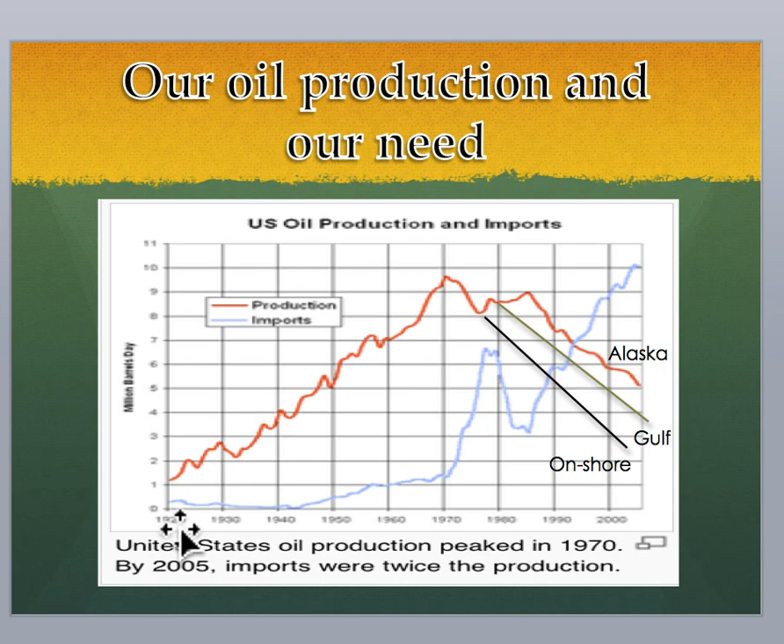They're slowing down now towards 8%, and Wall Street is panicked. But the ridiculous fact is that if they just stayed at 7%, by 2015 they will have doubled our carbon footprint. They're already greater than we are, but they will have doubled it.

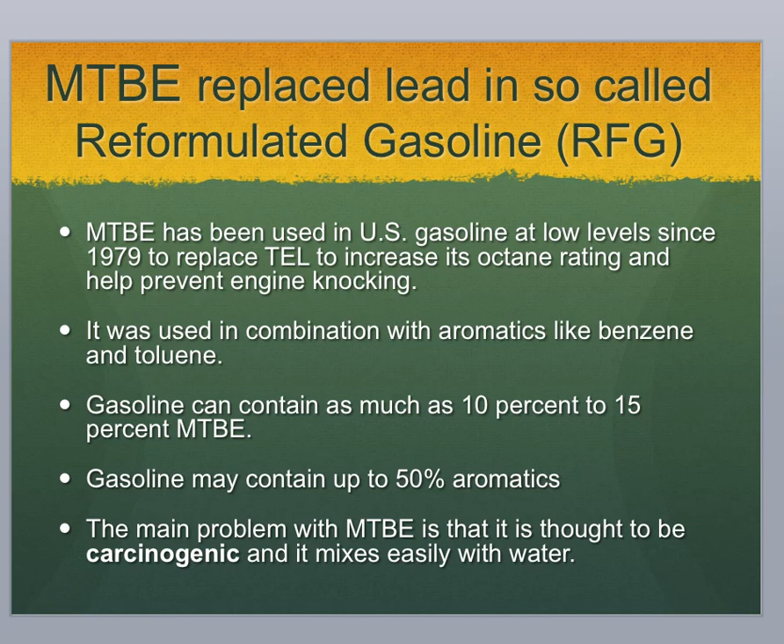So you were drinking basically water that would give you cancer. That eventually got to the point where it was legislated out. But before we get there, let me point out that the other thing they put into gasoline to get that octane rating up, so you had the power you expected from a gallon of gasoline, was benzene.

Now, benzene is a carcinogen also. It will give you leukemia. We'll mention that a little bit more later. But they figured, well, with the three-way catalytic converters they had to put in when they got rid of the lead, the benzene would basically get destroyed by the catalytic converter.

Now, what has turned out to be the case, and it took the Swiss to tell us this, is that they were right - the EPA was right, the car companies were right - when they did the tests on a bench stand at a constant speed, at an equilibrium rate of engine revolutions. The Swiss took the cars out on the highway and figured out a way to measure this on a moving car.

And guess what? They found there was up to 2 orders of magnitude - that means an order of magnitude is 10 times, so 2 orders of magnitude means 100 times more benzene coming out of the tailpipe than we had thought there was. Now, you have to really understand that when you go to a gas station and fill up your tank, that filler cap, if it's not sealed right, it's leaking all through your garage and filling your garage up with high levels of benzene overnight.

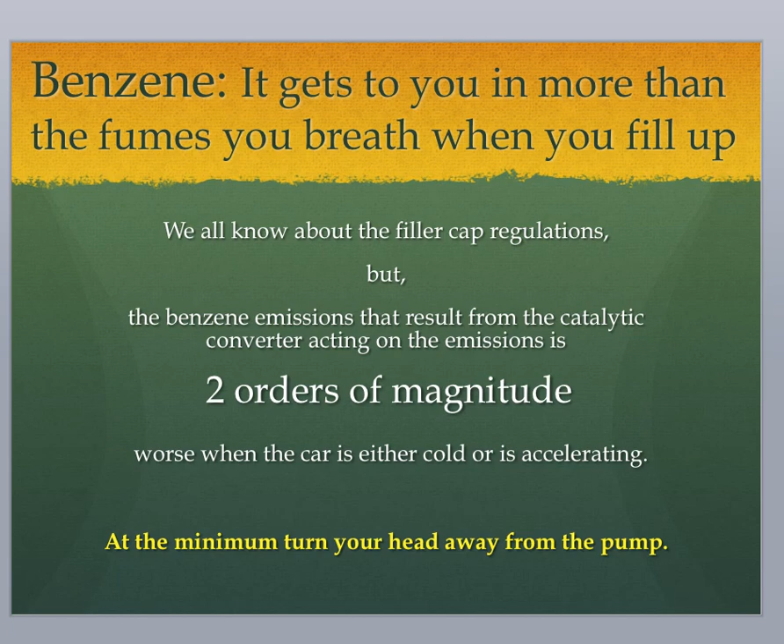Well, the World Health Organization says that 1 part per million of benzene is considered acceptable. You can argue what acceptable amount of cancer is, but let's just accept that for the moment. The United States EPA says there's probably 10 times this much in US air in the cities they have measured. And that Swiss study calculated that 100 times that much can be emitted from the tailpipe of an accelerating vehicle.

Benzene's a really big problem, and the oil companies are so powerful that you almost cannot find any literature about this. You've got to go really into the professional academic literature to read about these stories. But I want you to know about them.

When they finally found that MTBE got into the water supply—now water is far more carefully regulated than air. Benzene can get into the air and they'll get away with murder, but anything that gets into the water, thank goodness, at least in the United States, is really jumped on by regulators. In this case, they removed MTBE from the additives in gasoline.

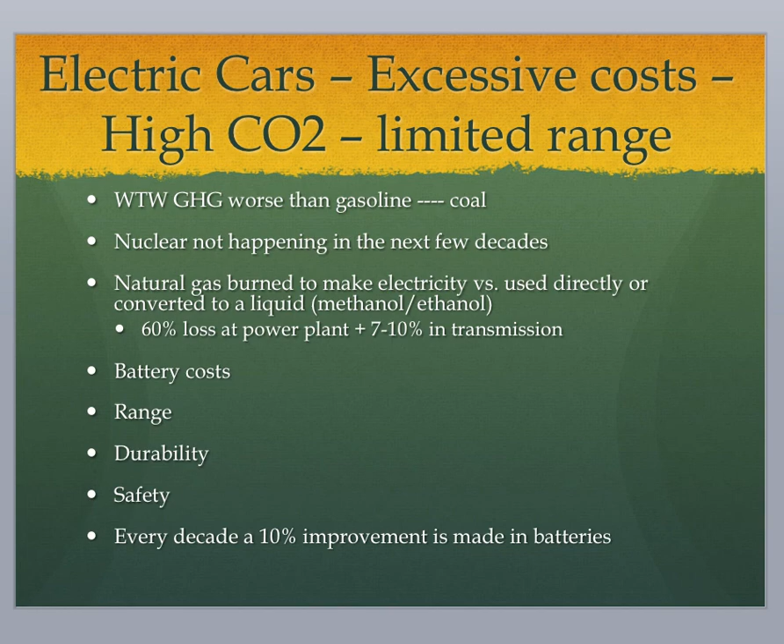So electric cars are not here now. What the people in the battery business say is that every decade there's roughly a 10% improvement in battery technology. Well, 10% improvement per decade means it'll take 100 years to basically double this range cost issue. We don't have the time. We need to move on from battery technology.

How about fuel cells, really quick? Well, there's sort of three kinds of fuel cells that ultimately may make it into cars.

The first are the platinum electrode fuel cells, the proton exchange membrane fuel cells, or PEM fuel cells. They need hydrogen to run, and hydrogen is ridiculously difficult to manage as a fuel carrier or energy carrier. It's very expensive, it leaks everywhere, and it's very hard to purify to those levels. It's not going to come down the road very easily.

Those PEM fuel cells could run on methanol, which could be reformed right there in the car fairly well, but they have other problems. In particular, they can be poisoned by sulfur in the air, and there's plenty of sulfur in the air. You stop at a stoplight behind a bus or a big pickup truck, and you could leave that stoplight significantly impaired, a few tenths of a percentage point less horsepower than you came in with. Imagine that at a few stoplights—it wouldn't take long for your very expensive car to not be worth very much.

There are these things called DMFCs, direct methanol fuel cells. They have even higher amounts of platinum in them, and platinum is the most expensive part, also subject to all of these poisoning issues. The one that may one day win out are these things called SOFCs, solid oxide fuel cells. They're largely made with sand, silicon dioxide, and they don't need the platinum.

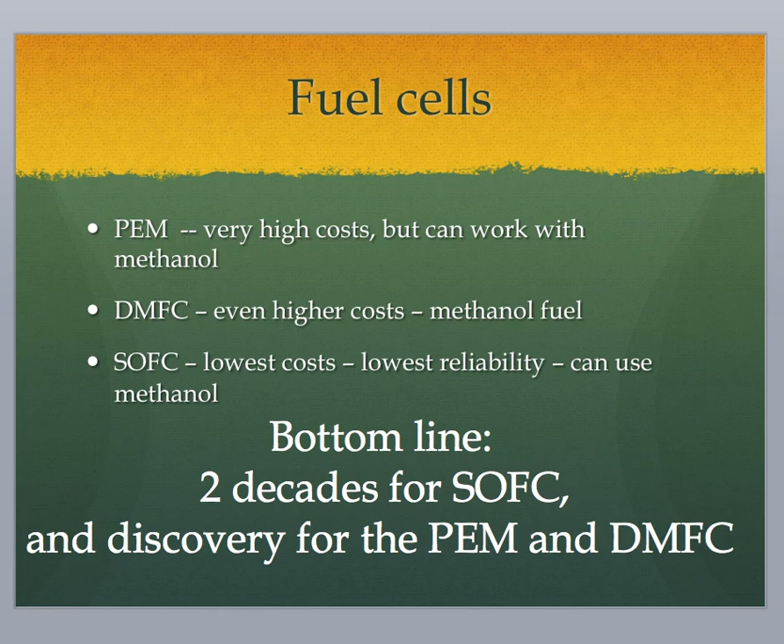Anyway, we're moving from fuel cells—another fantasy of the automobile and oil companies. They put lots of money into this, by the way. They need to divert your attention from the reality of alcohol, and they've done a darn good job of that.

For a decade, CNG, LNG—that's compressed natural gas or liquefied natural gas—has been currently very popular. It's been made very popular by T. Boone Pickens and a lot of advertising from the very large natural gas companies. Now, in the end, we're going to use natural gas, don't go away from that, but we're not going to use it as compressed or liquefied natural gas.

As the banner they use says: it is definitely clean, it is definitely abundant, it is definitely American. But it is not affordable. Let me first show you what you have to do, and then we'll show some numbers.

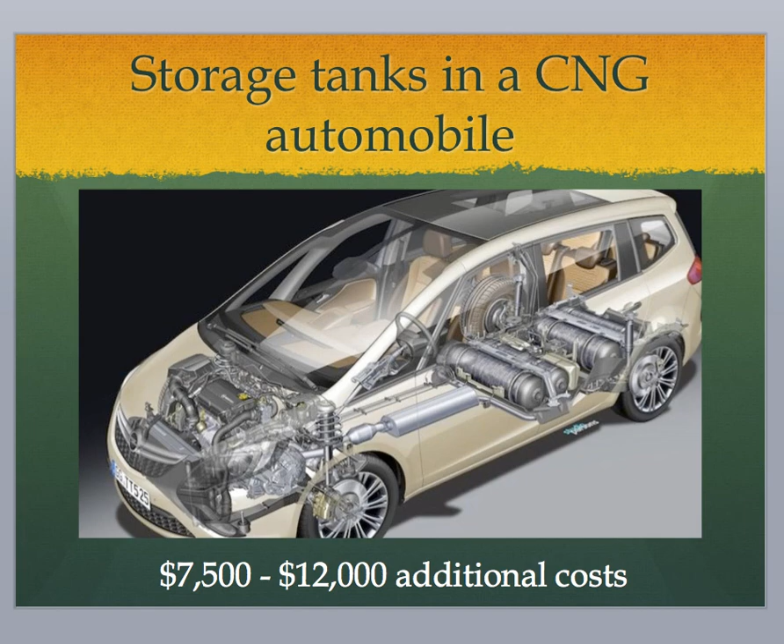The engine has to have different injectors. The modification to make a car a CNG car is $7,500 to $12,000, depending on the manufacturer and the car. A Honda Civic is roughly $10,000 more as a natural gas version, and you only have half the trunk because they stick one of those big cylinders in the trunk. You don't want to go natural gas—way too expensive on the car front.

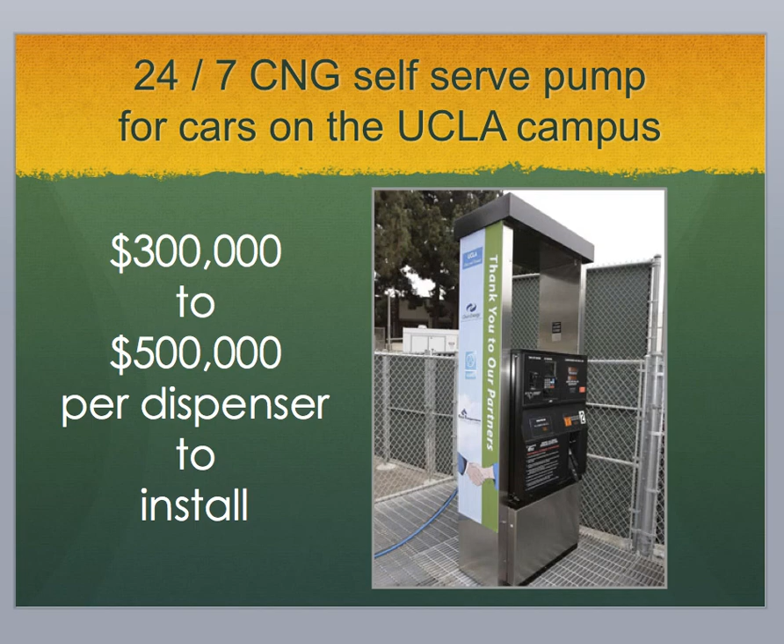Well, how about filling up? The filling stations have a real hit to take. A dispenser like this one at UCLA, the University of California, Los Angeles campus, costs $300,000 to $500,000—that's up to $500,000 per dispenser to install. Never mind maintain, just install.

So if you add this all up, what it amounts to is: if we wanted to get off oil by going onto compressed and/or liquefied natural gas, it would take roughly 100 times as much money to do that as it would take to make a completely flex fuel vehicle that could run on any kind of alcohol-gasoline mixture. One hundred times. Now let's look at that in real money.

What does that mean? What is our national debt? Our national debt, which is so occupying all the politicians in this election year, is on the order of $14 trillion.

Now, what is our gross national product? Our gross national product is on the order of $14 trillion. Do you realize that at the cost I just put forward for these cars and dispensers, it would cost on the order of $3 trillion, or 21.5% of our gross national product, to get our fleet of vehicles off oil. Well, we cannot afford that. No country can afford to do that.

Let me give a couple of examples. When we built the most extensive public works system ever, our interstate highway system, thanks to President Eisenhower—it's been a very good thing for us, by the way—it took 1.4% of our gross national product in 1958 to do this. When we fought for our lives against Hitler and the Japanese in World War II, at its peak it cost us 44% of our gross national product. This includes making the atomic bomb and all that.

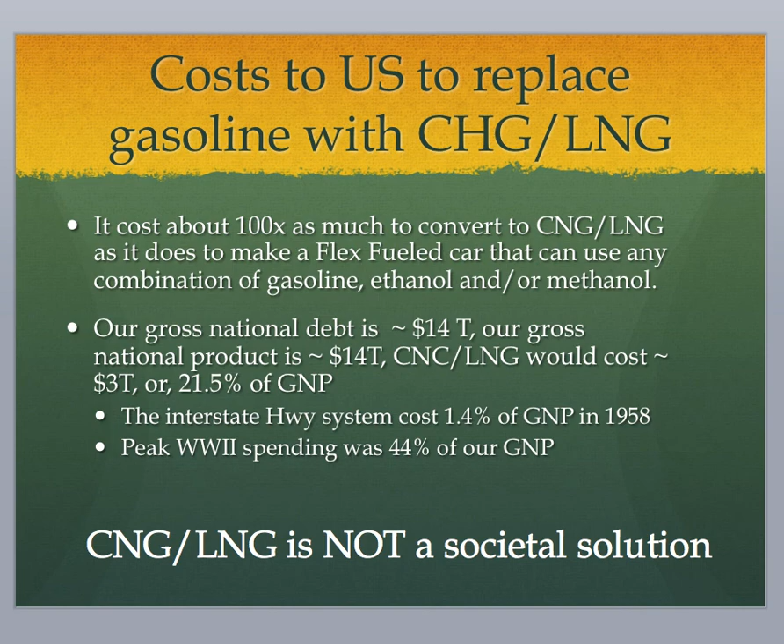Well, what do we do? What can we do? Where do we go from here? Is there anything we can do? And the answer is yes, 100% yes.

What we need to do first is stay with liquids. We need something as close to a 'drop-in' fuel as possible—the Department of Energy loves this word. Now, we're not going to have exactly drop-in; drop-in is for fanciful Walt Disney 13-year-olds. What we are going to have is a fairly close to drop-in liquid fuel. It's going to be alcohols.

And let's look at it, because we already have this in the form of ethanol. To convert a car—as the vice chairman of General Motors himself, Tom Stephens, points out—it will add as much as $70 to the production cost to make it flex fuel. When he's talking flex fuel, he means gasoline and ethanol. If it went all the way to including methanol, it might add another $30, is the general view. So many of these cars cost $30,000 to $50,000. The $70 is in the noise.

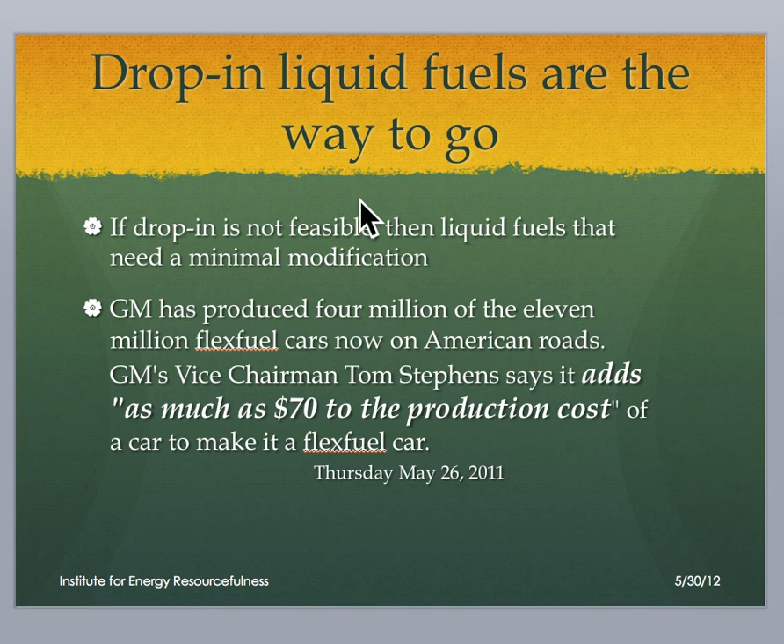Okay, well, do alcohols work? Henry Ford, no slouch in the auto business, said yes 100 years ago. Not only did he say yes, he said they work better. He knew it then, and it's been true ever since. He tried to make alcohol—ethanol, largely from farm products—the source of fuel for his cars. He had marginal success on that. Initially he had a lot of success. But then...

Rockefeller, John D. Rockefeller, who had these oil wells he was largely using to make kerosene for lamp oil fuel, realized he could use the wastes from his distillation process to make an internal combustion engine turn over—he could run your engine on gasoline. That waste was gasoline.

For a long time, there was a tit-for-tat between alcohol and gasoline. In the cities, it was easier to get gasoline. On the farms, they used alcohol. Then along came prohibition. Rockefeller strongly supported prohibition. Prohibition came in 1919 with the Volstead Act, and stayed as a constitutional amendment for 13 or 14 years. In that time, you couldn't make any alcohol, so Rockefeller's gasoline was what you drove your car on. It was during that time cars became an important part of Americans' lives, and Rockefeller cemented the idea of gasoline to run them.

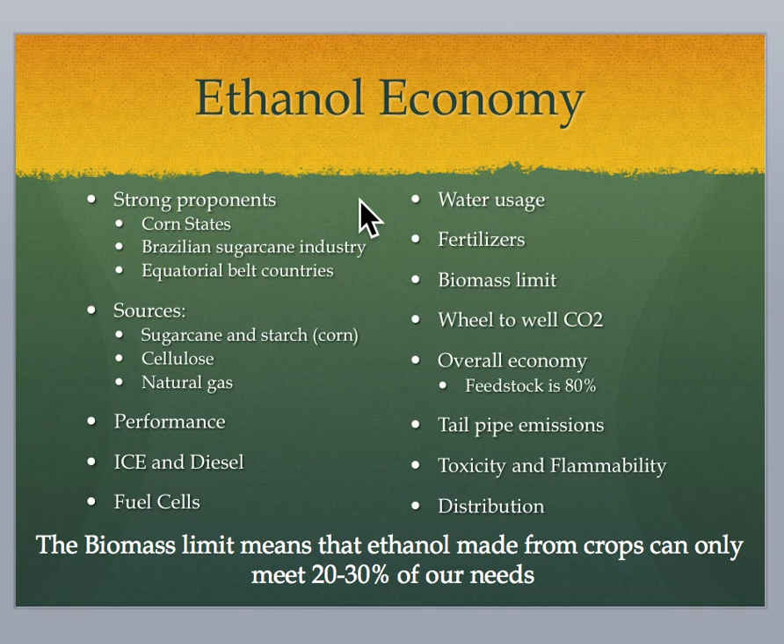The very first thing we have to realize is that car companies, when you have an E85 car out in America, you're getting worse mileage and worse performance. The car companies don't like this idea - it's not the way they want to go. However, one car company, Saab in Sweden, which used to be owned by General Motors, let them die. GM said, okay, you want to go E85? Let's go.

Now, how did they do it? They reprogrammed the onboard computer to take into account the extra octane that ethanol has. You don't need lead, MTBE, or benzene, because alcohol inherently has a lot of octane. Ethanol has 108 octane, methanol might have 110 octane - that's why they use it in racing vehicles. But you could use it on a street car if it's designed for it, and the Swedes did that.

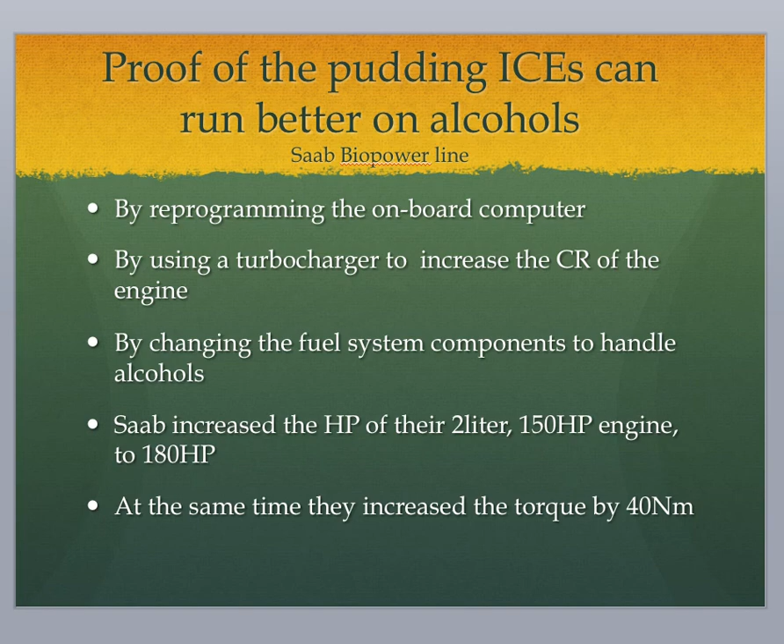In America, the cars they designed for us - why? Somebody will tell us one day, somebody will be in court one day - why they designed them so that they get less horsepower and less torque on that ethanol. Who's in charge?

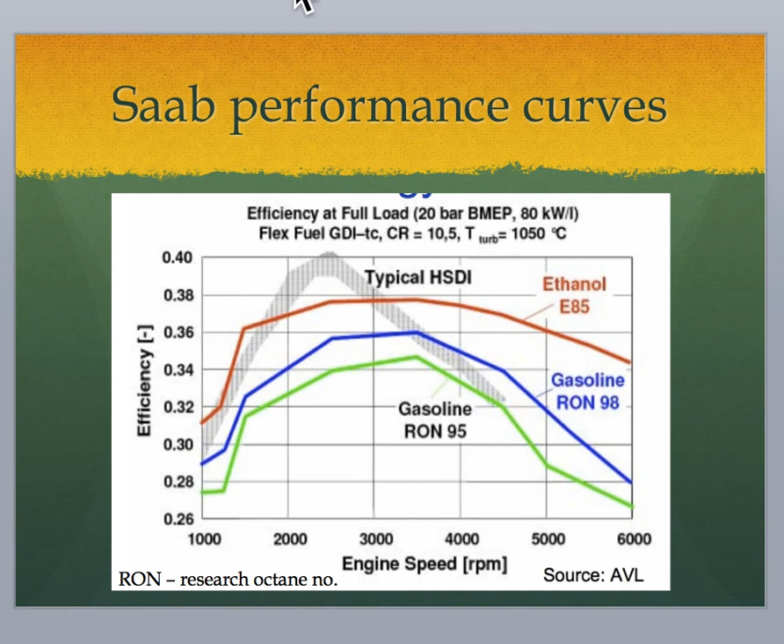For you engineering-oriented folks, I wanted to show you the efficiency of the Saab engine, the Buick engine, when run on 95 octane, 98 octane, and ethanol. You can see the red line is E85, the gray line is a diesel engine, which actually doesn't meet up to the E85.

The Biopower story started some years ago, but today the 95 Biopower is the most sold flex fuel vehicle in Europe, confirming our commitment to this renewable fuel and to reducing carbon dioxide emissions. Today we are introducing a new concept, the Biopower 100, based on 100% ethanol, a concept that will describe the potential for the future.

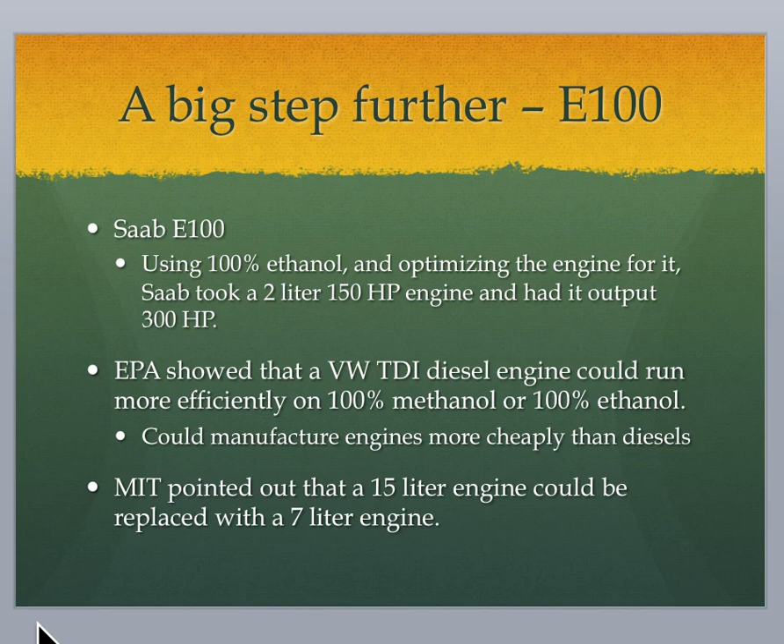Once again, for the engineers, these are two plots showing brake mean effective pressure on the ordinate versus RPM on the x-axis. You can see the 40% efficiency contour of that Volkswagen direct injected diesel engine running on diesel fuel, a small circle in the middle. When they ran this engine on 100% ethanol, that 40% contour widened. I'll show you later that on methanol, it widens even more.

This really means a lot of things. One, taking out all that diesel injection equipment, the very high pressure common rail system at over 100,000 psi, means the engine is less expensive. Also, you don't need the diesel particle filter downstream, and you don't need the urea filter to keep NOx down, because there's so little NOx coming out of alcohol combustion, totally unlike diesel fuel. So you don't need diesel engines anymore, with their pollution problems and the cost of diesel fuel.

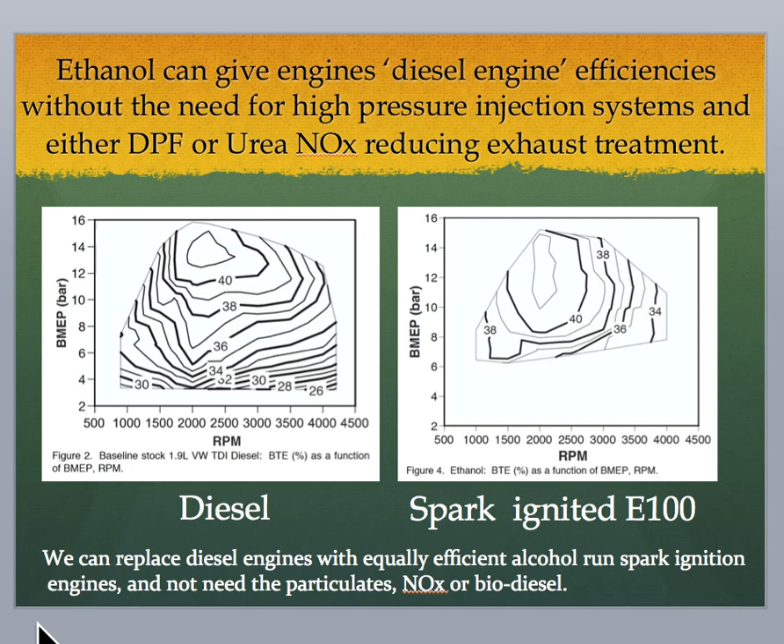Let's go a step further. The EPA also asked: how far down can I cut the amount of ethanol in the mixture and still get equal or greater power than running on gasoline only? They determined that at E30, 30% ethanol with the rest gasoline, they could get an estimated 10 to 12% gain in fuel economy. That more than compensates for the approximately 8% loss in energy density, since alcohol is lighter and has less energy per unit volume than straight gasoline.

So in a way, E30 is a magic number. We're not allowed in this country to use more than E10 at the moment.

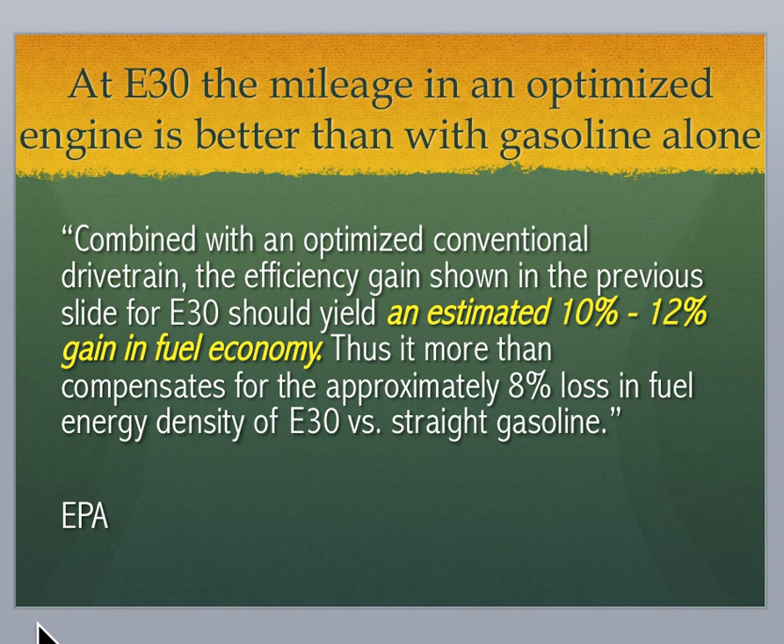Okay, back up to higher percentages of ethanol. In Sweden, don't ever say that we are the most advanced engineering country in the world. We are hobbled by our politics and by our history. And we're becoming hobbled to the extent that we are really going to suffer for it. Swedes, for 15 years, have had a set of buses that run at 44% efficiency on 95% ethanol.

Diesel buses, diesel engines, previously diesel engines. We need to do this. This is way better than compressed natural gas. We need to do this.

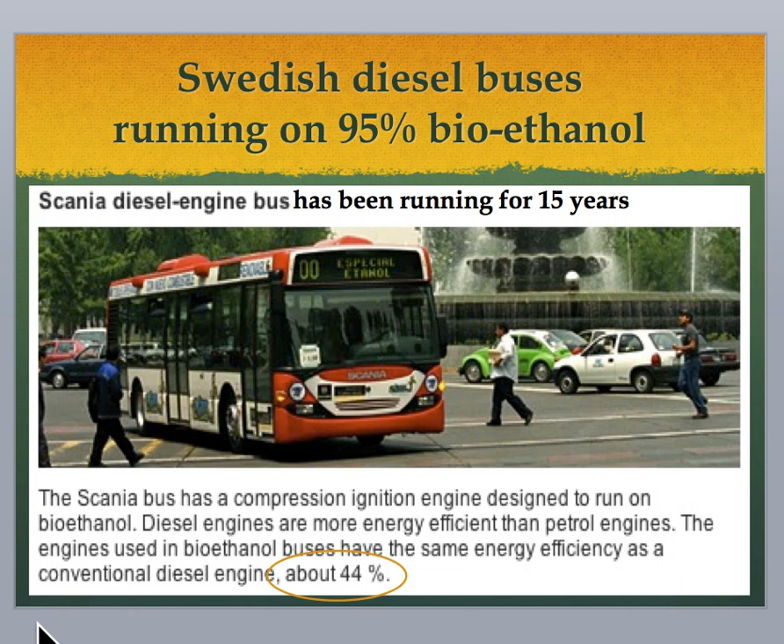Okay, now we know ethanol has only two-thirds of the energy per unit volume of gasoline. But because we can run it at higher compression ratios and get more power out of the thing, this almost essentially goes away. Okay, now what's happening here in the United States?

Well, if you had a car that was an E85 car, 2002 or earlier, you really lost essentially all of that energy. You lost 30% when you ran it on E85. Okay? Somehow, and nobody's telling us, but they better tell us one of these days pretty quick, after 2003, it seemed that the loss was reduced to only 15 to 17%. And now, in some of the newest American vehicles, you only lose 5 to 15% running on that E85. So they are doing things, without even telling us, behind the scenes, that are making these things better.

But at the same time, we have this impression that they're horrible, back pre-2002. And I'm telling you that Saab and other companies, I'm going to show you some other ones, have actually broken this cycle already. Okay. So are we being manipulated by basically business-directed engineering?

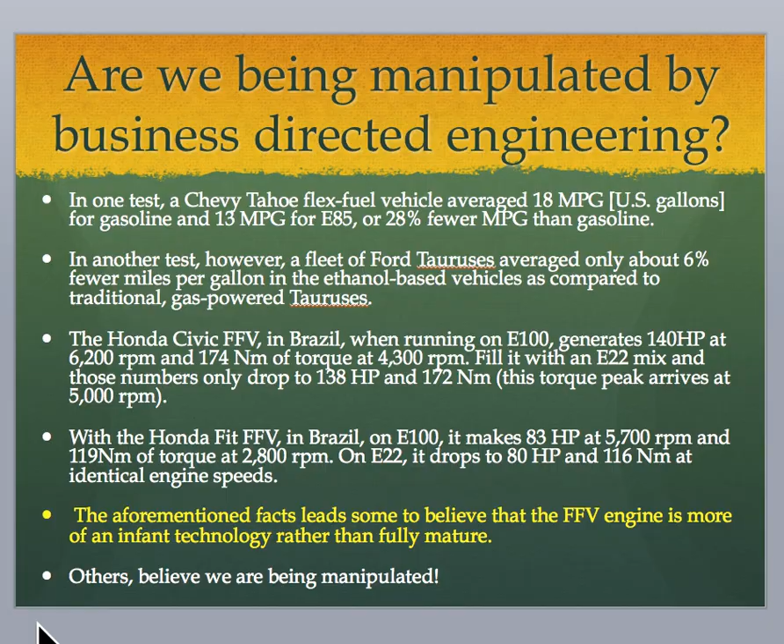Okay, now let's get a little realistic about ethanol. Ethanol is not all good. It uses a lot of water. You've got to grow that corn over a whole season. Then you've got to do the fermentation process in the ethanol factories. And in the end, you're using something like 2,350 gallons of water to go 100 miles on ethanol.

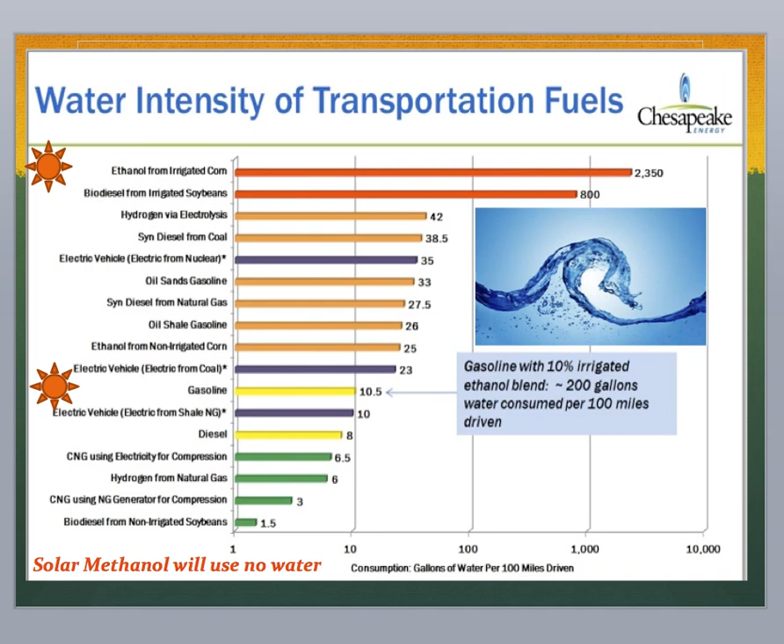Well, as it turns out, you can make methanol for either zero water, there are certain ways I'll show you later, and or about 20 gallons of water per 100 miles that you drive. So as we look at alcohols, we're going to want to see what the options are to get away from ethanol.

Okay. Before we leave it, though, we want to point out to you that there are a number of non-corn ethanol sources that are actually reasonably good. Now look, the immediately obvious one that's in practice right now is sugarcane. Brazil is a huge country making huge amounts of ethanol, driving their cars on it, very large number of their cars on it. They don't need to water the sugarcane. It's in the equatorial belts, gets plenty of water. It's very efficient to make ethanol from sugarcane. We could do this in Hawaii too. We used to grow sugarcane in Hawaii. For example, we grow some sugarcane in Florida, but not nearly enough to meet our needs of ethanol.

We could also, in much colder climates, grow sugar beets. There are a lot of countries that could make a living on sugar beet ethanol around the world. Something to keep in mind.

But now let's move away from food crops and think about the fact that ethanol can be made from natural gas very efficiently. Celanese is a company that has a process for making ethanol from natural gas for roughly $1.50 a gallon. Pretty good.

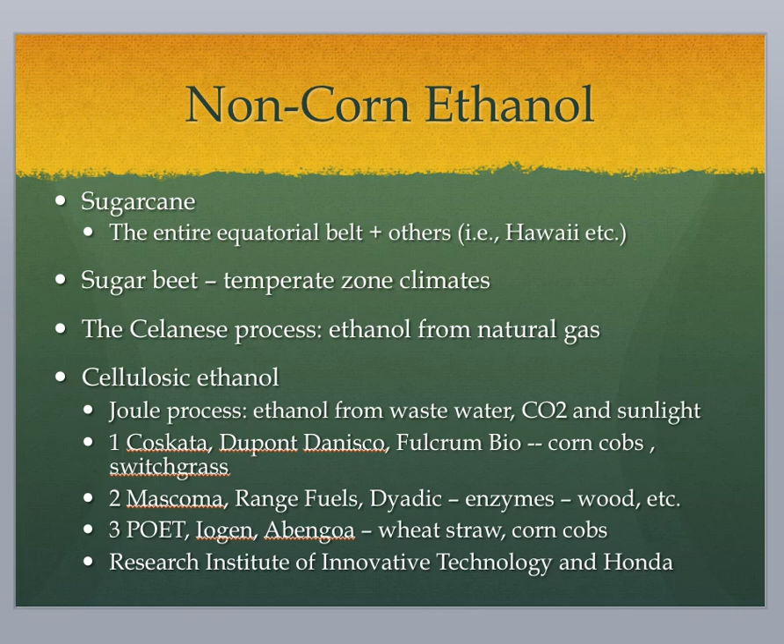Well, let's move on now. The other alcohol is methanol. Methanol is a really important alcohol. Already in the world, there's something like 100 million tons of methanol made annually for all kinds of chemical reasons. They make formaldehyde out of it to make building materials. It's a base for all kinds of chemicals.

But we want to actually use methanol as a fuel. Methanol will be a great fuel. In fact, all these bullets aside, it will be the cheapest liquid fuel we could possibly make, and it will have the largest number of non-food sources. One of the really largest ones is natural gas, of which we have a huge amount.

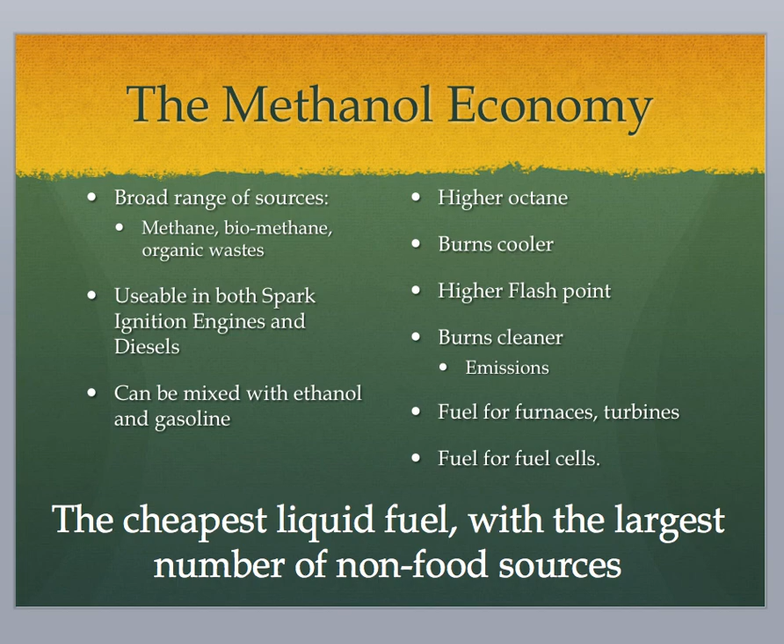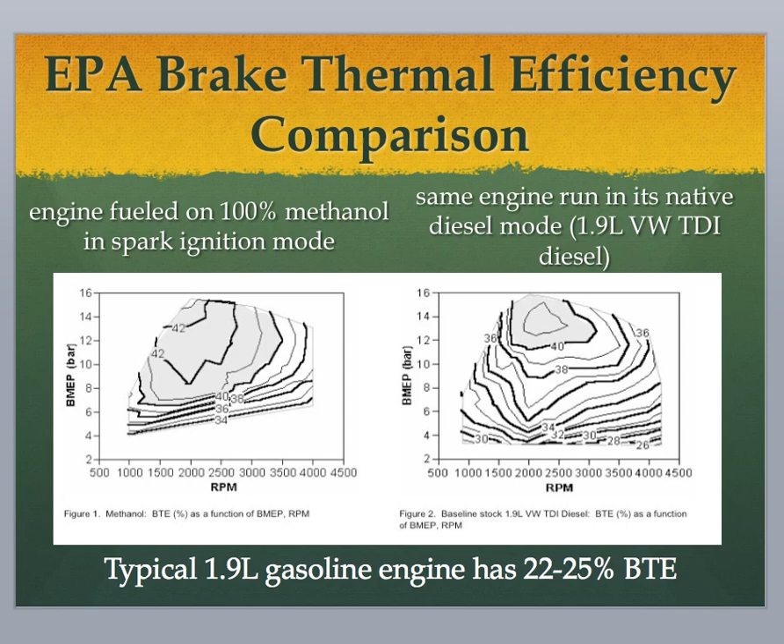This means we do not need diesel engines. We don't need to knock down primeval forests and put up palm trees. We don't need biodiesel. We don't need a second line of product. We could downsize engines, run them on alcohol, completely win out in terms of the cost going in, the emissions going out, and basically the whole cost of running the thing. It'll be lighter, cheaper, smaller, just a much better engine. We need to move to methanol and/or ethanol.

MIT's approach or comments on this basically say that you can save $10,000 to $15,000 on the engine alone. Never mind the fact that it'll later allow you to carry more cargo because it weighs half as much, etc. If you ran a large engine, the kind that can run an 18-wheeler, on methanol rather than diesel fuel, you'll have reduced maintenance. Certainly fuel will cost less, and you'll get better mileage. Imagine.

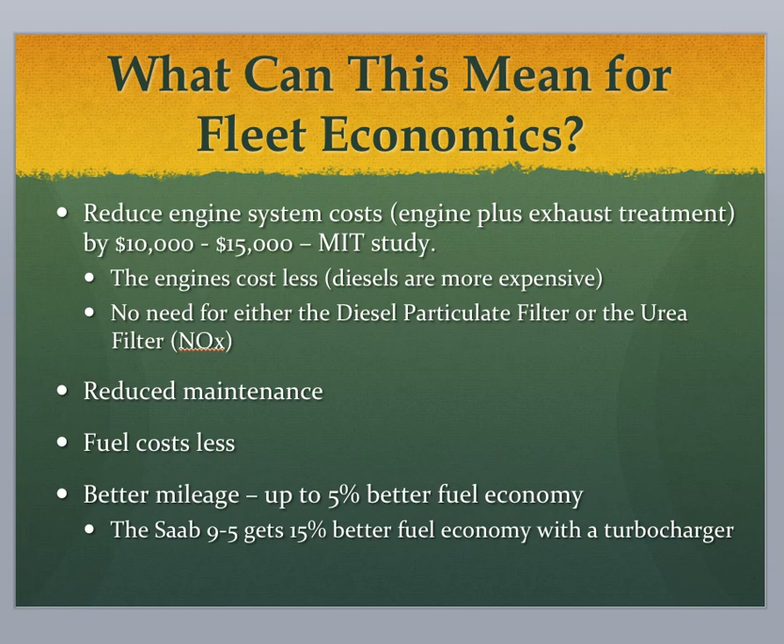We could do this almost overnight. You won't need diesel engines with all their extra cost, all their extra weight, all their extra emissions, all the extra cost of diesel fuel. All that could go away.

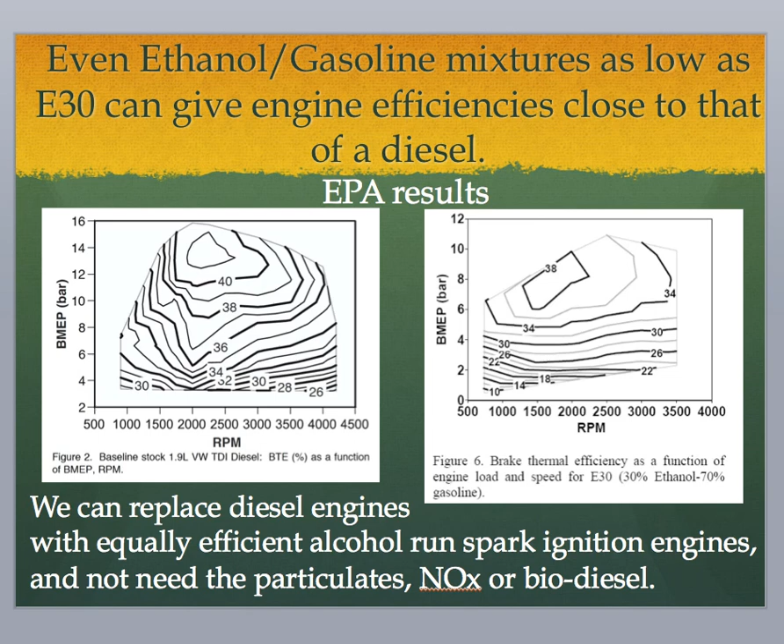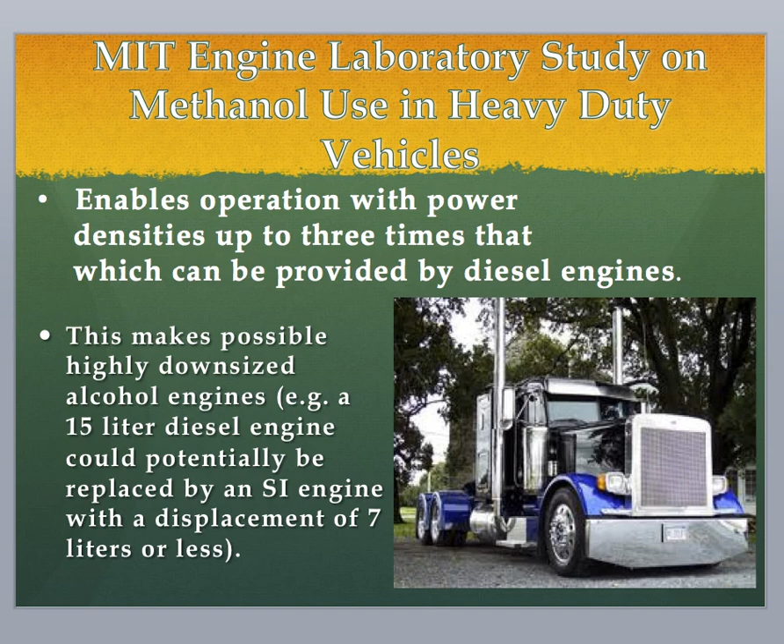Imagine the weight, the cost, the extra cargo weight you could carry, the much greater fuel economy of a much smaller engine—all the way around a win. We've got to get off oil.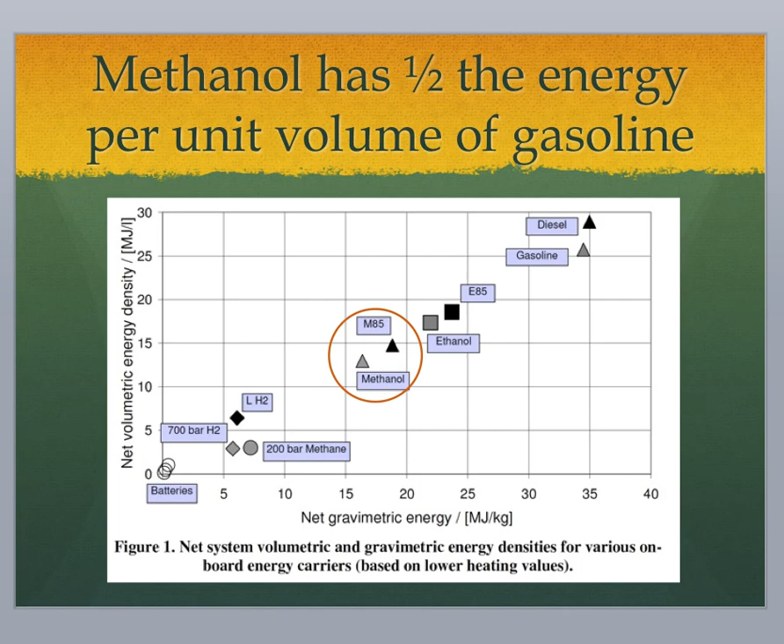Methanol has half the energy per unit volume of gasoline or diesel fuel, so you'd need a slightly bigger fuel tank on that truck or under the flooring of your car. Remember, it's a liquid—not under high pressure like compressed natural gas or propane, or no pressure at all. It's at atmospheric pressure. So building a slightly larger fuel tank in the space under your car would be essentially a no-brainer and a very low-cost addition.

What about greenhouse gases? They're a big problem. Over the next four decades or so, the world as a whole has said this is the critical period—we have to do a lot to try to reduce them. On the surface, going to alcohol fuels like methanol won't make much of a change if you make the methanol from natural gas, which is how most methanol is made right now. The issue is that it's the same amount of greenhouse gases as gasoline. That's what that line's all about. But it can be much less.

Look at the circled column at the end—it's showing very, very little additional greenhouse gas. Now, both in Sweden and in Germany, using very different techniques, they are making methanol that essentially has no net well-to-tank greenhouse gas contribution. This is very, very important.

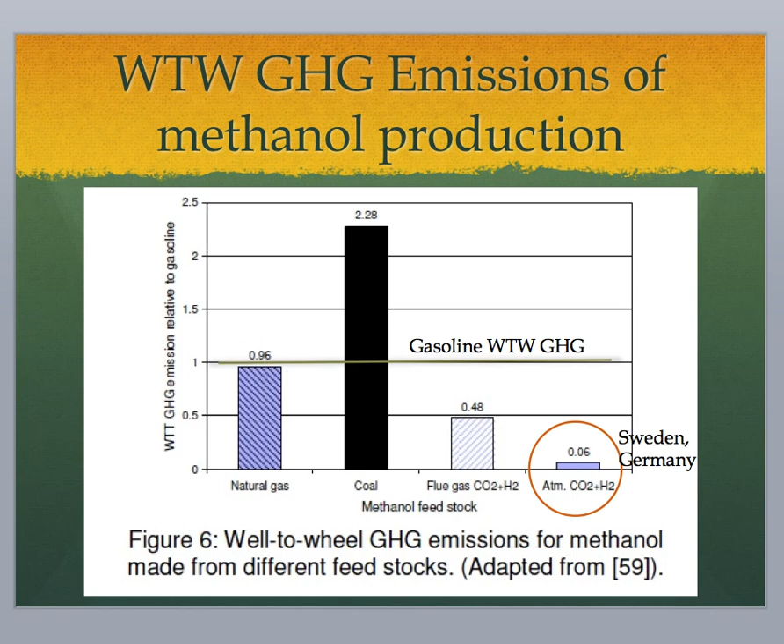You can make methanol from organic wastes. In Germany, they're making it from sewage sludge. In Sweden, from the waste of paper mills. But in America, we are the Saudi Arabia of wastes—we have more waste, something like 4.5 pounds per person, than any other country in the world. If we refocus our energies and thoughts to taking that waste and making methanol from it, we can have a very, very green world and a very exciting driving experience. We don't have to shrink down to tiny little cars that run on batteries for 40 miles—we could keep the vehicles we love, enjoy them, and even get more power out of them.

What about safety? It's a really big issue, and methanol wins out over gasoline hands down. You all probably know the Indy 500 and many other races, for over 4 decades, have gone off gasoline onto methanol because it burns much cooler—one sixth of the heat—and much cleaner. You can see where the fire needs to be put out, where the person with the hose needs to be, and you can put methanol fires out with water. You cannot do that with gasoline. It's much, much safer—the Society of Automotive Engineers says there'd be a 90% reduction in fuel-related automobile fires if cars ran on methanol.

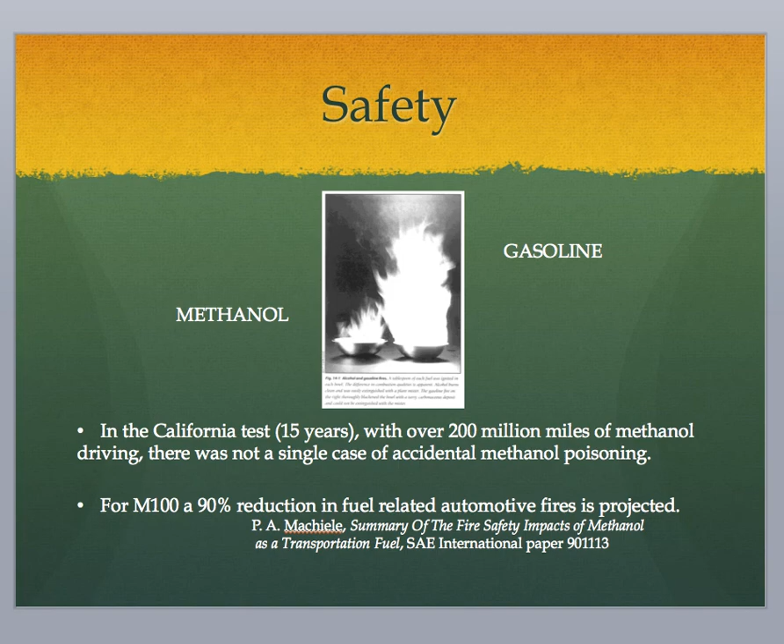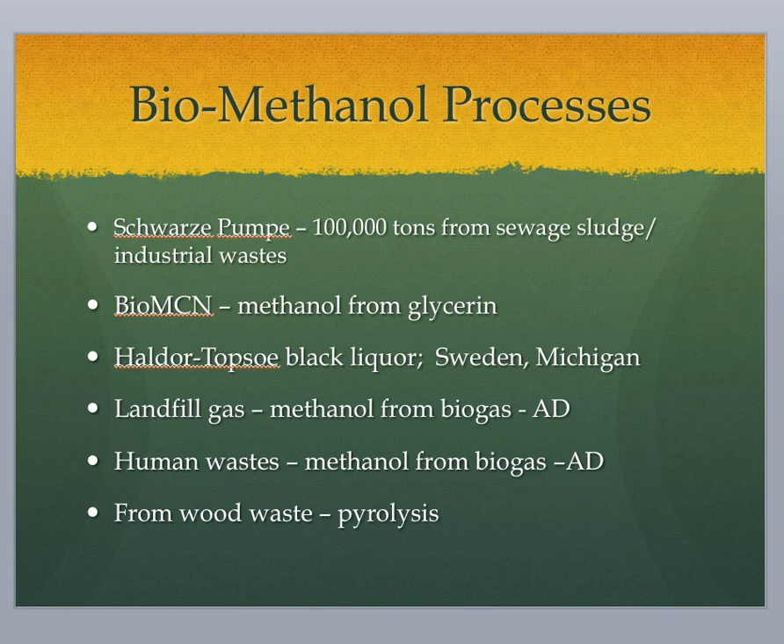It's a hands-down win. How about making methanol from biomethanol processes, i.e. not using natural gas? There's a whole slew of ways to do that. There's a company named Schwarze Pumpe that makes huge amounts of methanol from sewage sludge and industrial wastes. A company called BioMCN makes it from waste glycerin. A company in Sweden, together with Haldor Topsøe, makes it from paper mill waste—they were going to do this in Michigan right before the recession shut them down; that may pick up again. You can also make it from landfill gases, human wastes, cow manure, wood particles, and all kinds of forest wastes.

Let's go back to how we're going to get there. You can do it, you want to get there, but we don't exactly know how. We need to think of the easiest ways to make the transition. The transition is the key—if we can make the transition, we know, because the objective is so good, that we'll want to get there.

Talk about an easy transition: Lotus Vehicle Engineering—you know Lotus, the really hot cars—came up with what they call a gem of an idea. GEM stands for gasoline, ethanol, methanol. The idea is literally to fool an engine that would otherwise run on ethanol and gasoline into using methanol without it knowing.

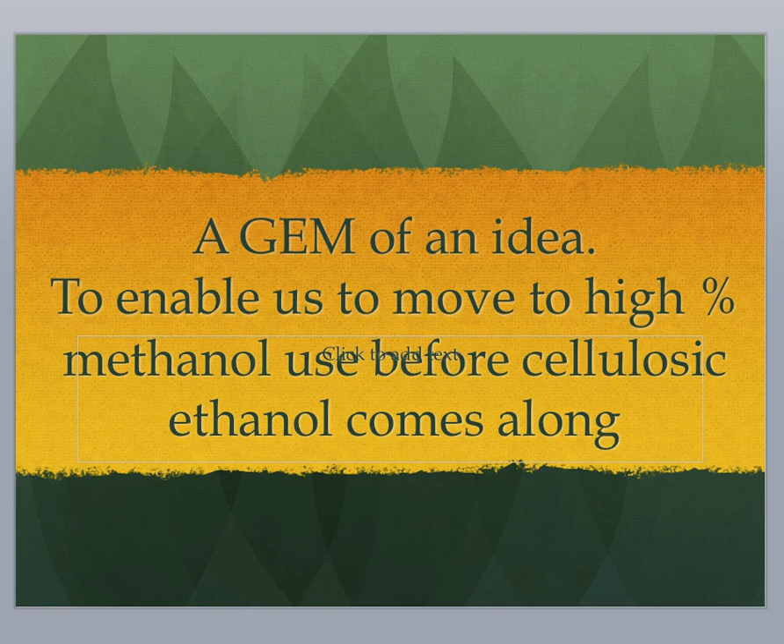Now, if you could do this, we could take a large number of cars that are on the road right now and start moving them off both ethanol and gasoline.

Okay, so the GEM idea is to find exactly the right blend of gasoline, ethanol, and methanol. In the United States, we have 11 million of these flex fuel vehicles on the road, and we're getting 4 or 5 million more every year.

Make these cars think that the octane in that fuel, think they're running exactly what they've been specified at the factory to run on with ethanol and gasoline, but substituting some of the ethanol with methanol.

And the way you do that is you make the octane rating of this blend be exactly the same as it would be programmed in by the factory if you were just using ethanol and gasoline. You also make the volumetric energy content in the blend equal to what it would be if there was just ethanol and gasoline in the mixture, and you make the latent heat exactly the same as if there was just ethanol and gasoline, but you are going to throw methanol in there.

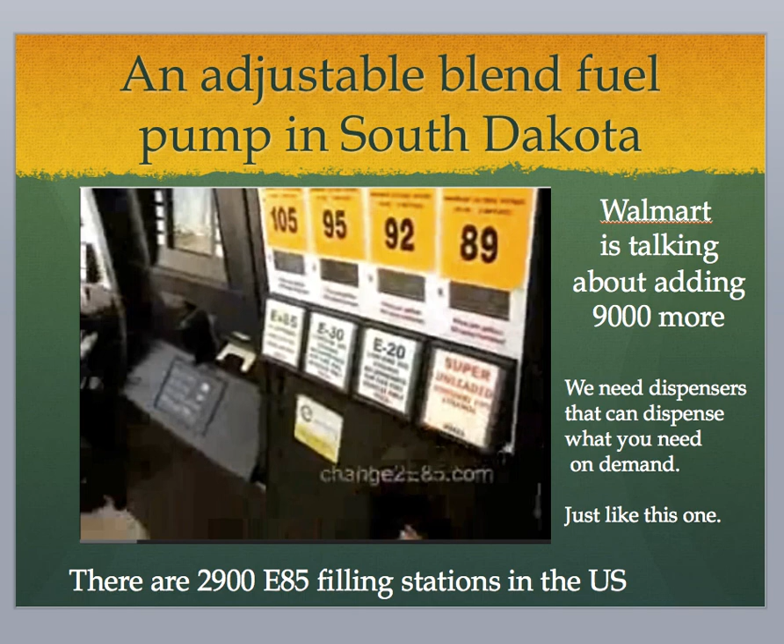And of course, cheaper, and of course will have lower emissions. There's already a setup in this country to start making this happen. There's an adjustable blend fuel pump in South Dakota. It's blending three blends: you can see E20, E30, and E85, as well as gasoline. But theoretically these adjustable fuel pumps could be adjusted to anything you want, including methanol-ethanol combinations.

At the moment we have 2,900 E85 filling stations in the United States. Most of them are just E85, not adjustable like the South Dakota one, but there's a growing number that could be. Walmart is talking about adding 9,000 more E85 filling stations in their stores across the country. Let's hope they put in the adjustable ones, and let's hope a company like Honda can sell us these cars they've sold into Brazil for 6 years now. Why are we the poor cousins?

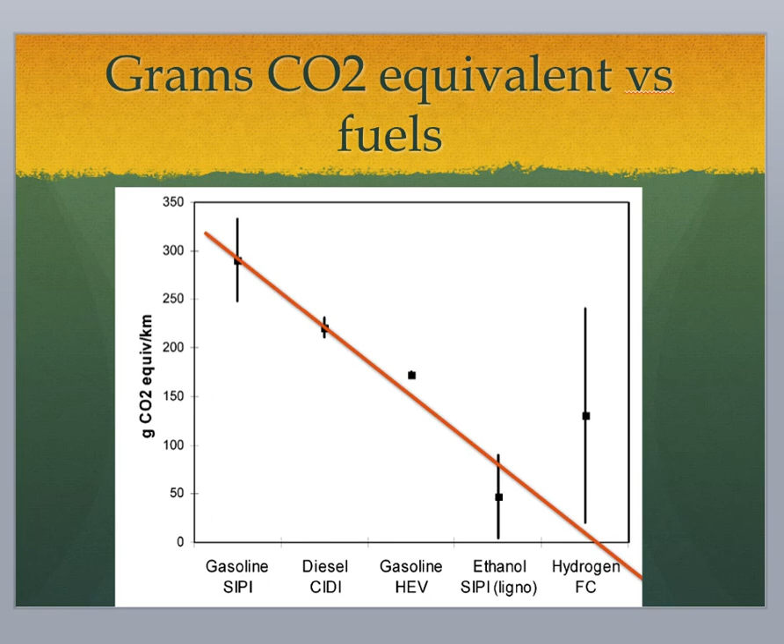Okay, future directions - let's whip through this quickly. There are a lot of ways to make methanol and ethanol, as it turns out. We covered some for ethanol; here are a few for methanol. You can reform natural gas. You can make it from the anaerobic digestion of organic waste, the pyrolysis of organic waste like wood chips, etc. You can use direct enzymes and solar transformation to make ethanol from CO2, wastewater and the sun. You can dry-reform methane and carbon dioxide to make methanol in a carbon-dioxide-negative process. And you can use the methanol as a fuel for fuel cells. These are all going to be future ways of using alcohol to really run our transportation industry.

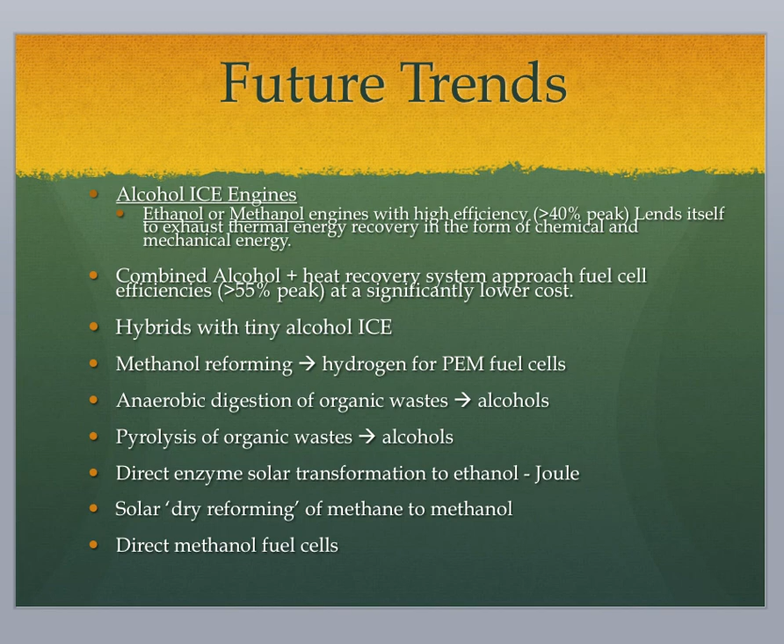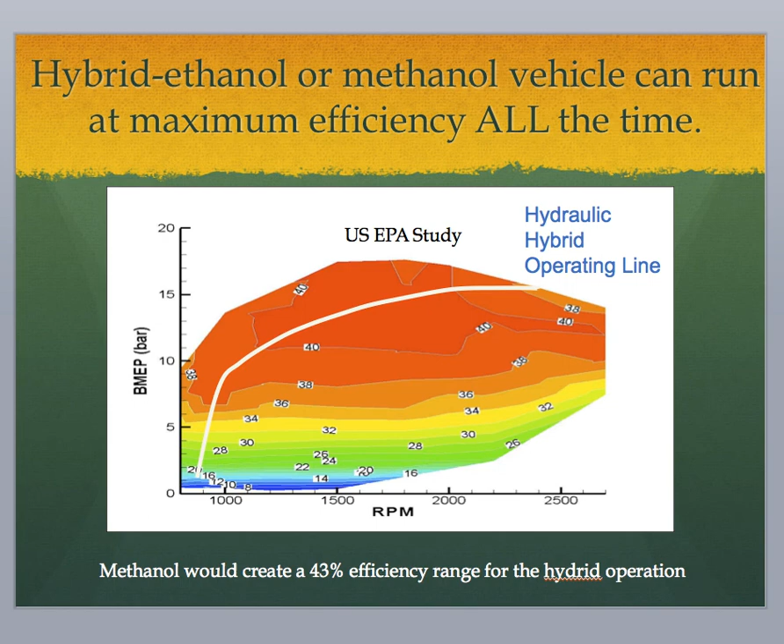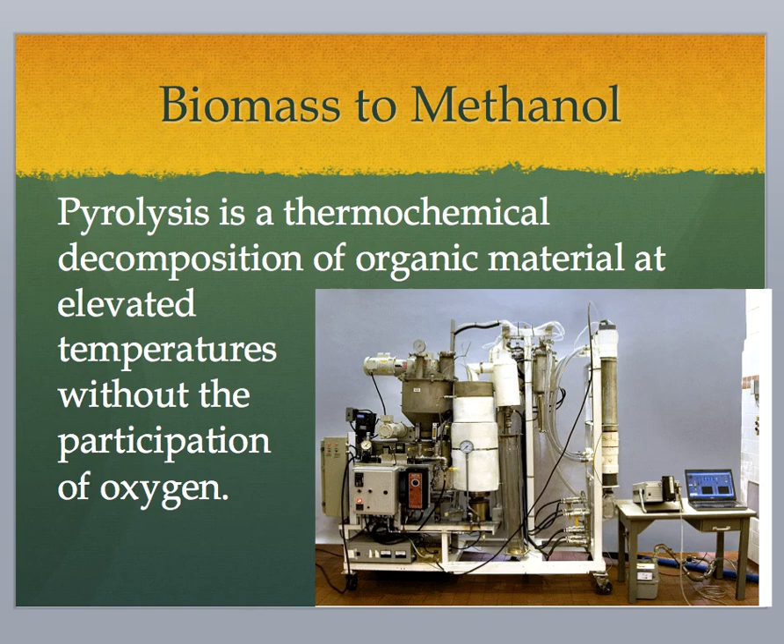But now let's talk about cow waste, cow manure—could be pig, chicken, or turkey manure too. You anaerobically digest it, and out comes methane and carbon dioxide. Using both the CO2 and the methane, you can make methanol and drive on it. This process is pretty efficient, about 60%, and otherwise it's just manure you'd be throwing out.

Now, if manure or human food waste were thrown in a landfill, that's essentially an anaerobic digester. You can use the same technique—you get methane and carbon dioxide out of the landfill, put it through the gasifier, make methanol, and run your car on it.

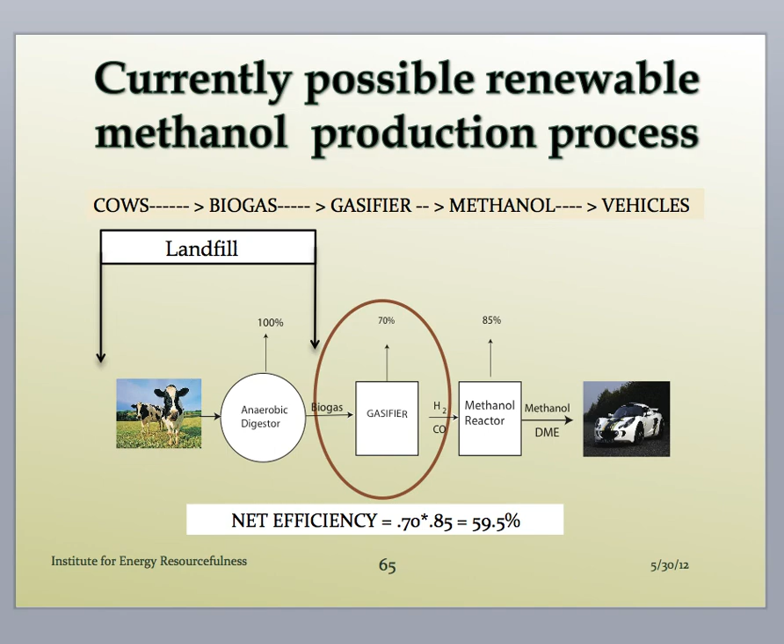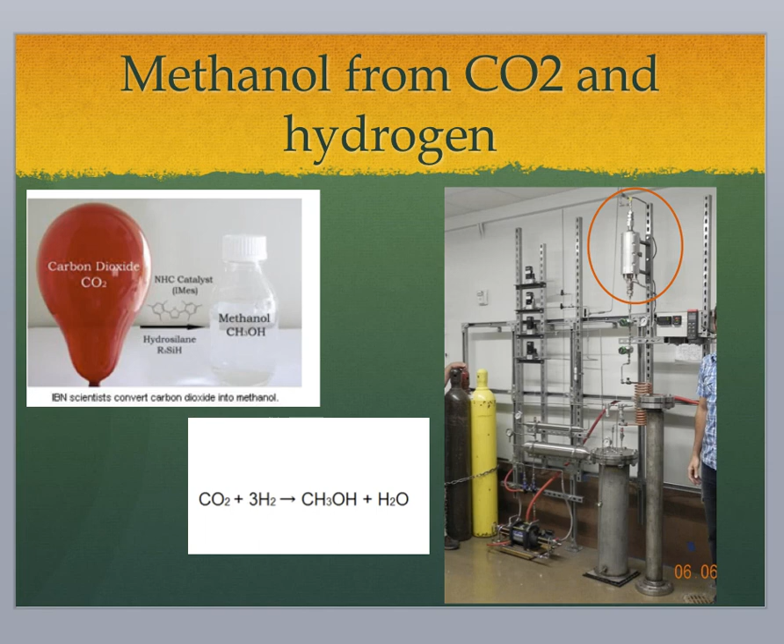You can also make methanol from hydrogen and CO2. You might ask, where's the hydrogen coming from? It just might be true that your local power plant—nuclear or even coal—isn't actually shut off at night, and a lot of the electricity produced is just wasted. What if that electricity ran an electrolyzer making hydrogen, combined with CO2 from smokestacks or some other source, to make methanol and store it in a tank? You'd have fuel from essentially waste electricity.

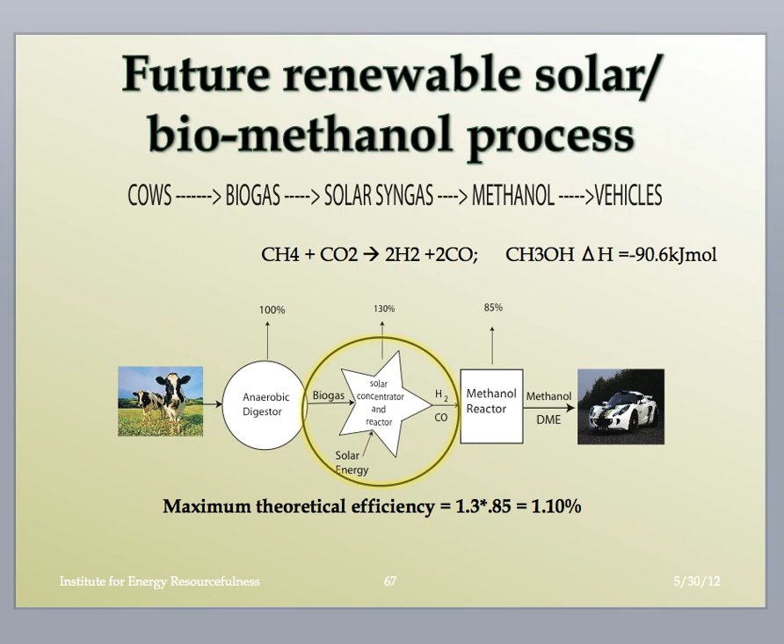Go a step further—take an anaerobic digester again, but this time cook the methane and CO2 to a high temperature using the sun. Suppose we concentrate solar energy on a reactor that cooks the methane and CO2 above about 1100 degrees centigrade. This is called dry reforming of methane—you come out with hydrogen and carbon monoxide, run it over a catalyst, and out comes methanol. Because the sun is putting energy in, this process is actually more than 100% efficient. It's a tremendous process, using both waste energy and the sun's energy combined to make clean, clean, clean fuel for your car.

All right, we're almost done. The main takeaway: don't get hung up on problems with corn ethanol—that it uses lots of water and a crop we could use for food. Alcohols are definitely in our future, both ethanol and methanol, and down the road they'll largely be made from non-food origins. When that happens, they'll be cheaper and won't compete for land, water, or fertilizer. Remember, alcohols are the only replacement for oil in the form of gasoline or diesel in internal combustion engines as we know them now. They are the most sensible, immediate liquid replacements.

They are also, as it turns out, methanol will turn out to be the best carrier of energy for fuel cells. Methanol liquid carries in liquid form more hydrogen than liquefied hydrogen in the same volume. It's a tremendously good fuel for fuel cells, all three kinds.

Whoever wins out, we don't really know or care right now. But if we have a methanol distribution system that we're using for decades and decades in our internal combustion engines, when the fuel cell of choice wins out 2, 3, or 4 decades from now, that fuel distribution system of methanol will be there for it.

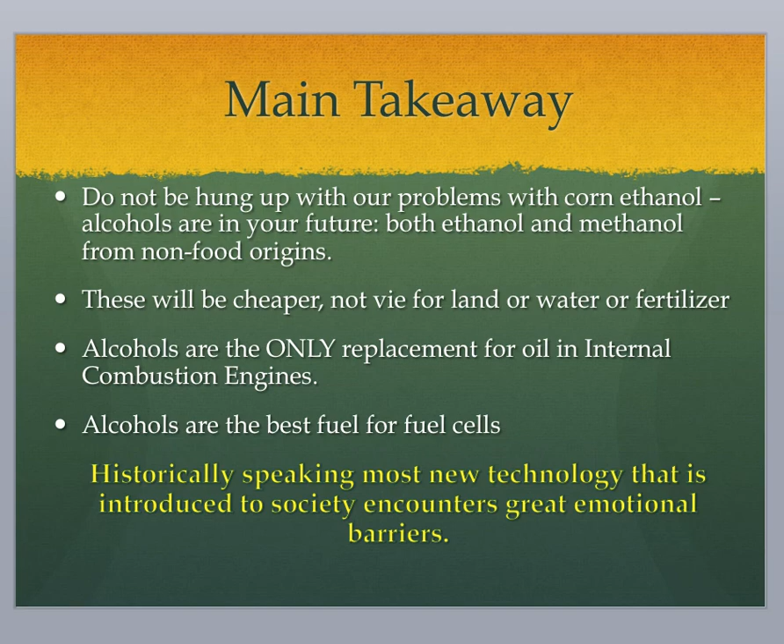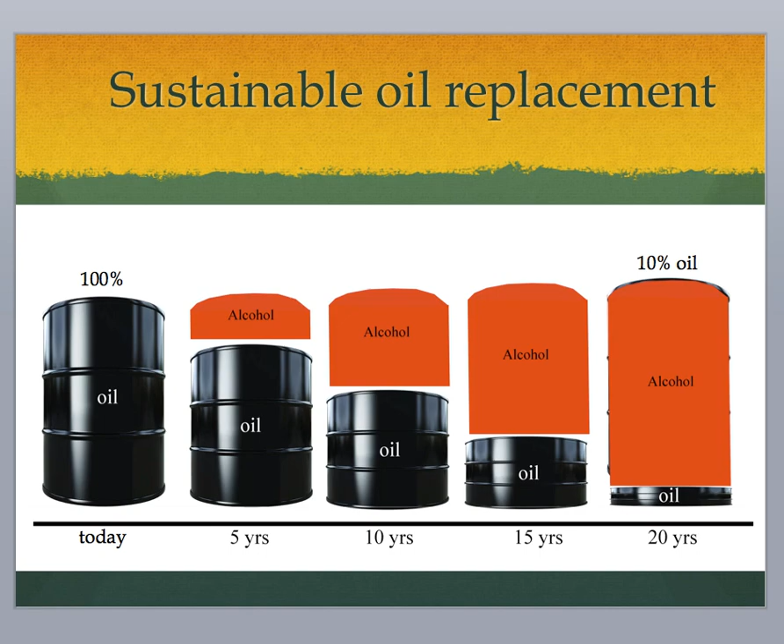See, every year we make on the order of 12 million cars. Well, 20 times 12, that's 240 million cars. Our total fleet today is only about 250-something million cars. We can essentially almost completely replace our fleet of gasoline and diesel vehicles with alcohol vehicles if we started making them today.

So there are a couple of things we can do immediately. One is we have to find out whether the car you have right now can use methanol. And if it's not even an E85 car, can it use ethanol? There are arguments that say the engines are not even logistically separated out from the engine plant to the assembly plant, so your engine may already be set up to use alcohols. We don't know that. Maybe your fuel system isn't. Maybe you need $100 in the service department of your dealership to change this over, but wouldn't it be nice to know that?

Try to think of ways to get this issue on the national political scene, because if it can be debated nationally, you'll find out if I've made any mistakes or all the people I've consulted with are wrong. If we are, we're going to be shifting our position a little bit so that we will be correct and we will be, in the end, winning the day.

Okay? We want to prepare for alcohols in our future. We need our cars to be able to use them. We need to tell our representatives that we want that solution as quickly as possible, whether it's federal, local, or state.